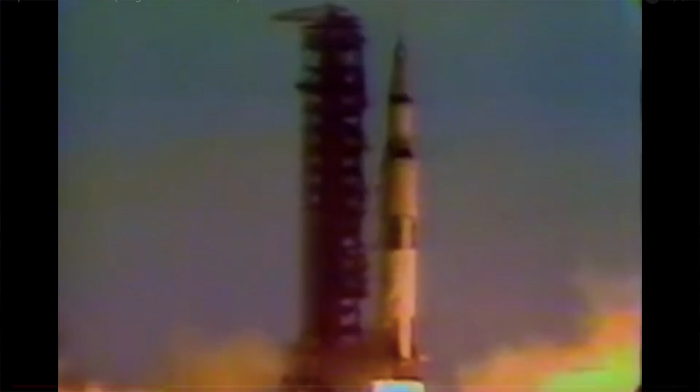Who knows? The first powered flight in an airplane happened in 1903. That flight only went 260 meters. 66 years later, we flew to the moon, which is 400,000 kilometers away. Nobody could have seen that kind of progress coming, so I'm not going to try and guess the future of alternative energy. Back to electricity.

For the typical household, air conditioning is the most energy-intensive component of your home. Heating is second if your house has electric heaters. Other homes burn natural gas to heat the rooms, and the water, which is the next leading use of energy in a typical household. So how can we get power to the house in alternative ways?

Let's begin with solar power. Solar energy can be harnessed in a few different ways. You can make electricity directly or indirectly, or solar energy can be trapped to provide heating.

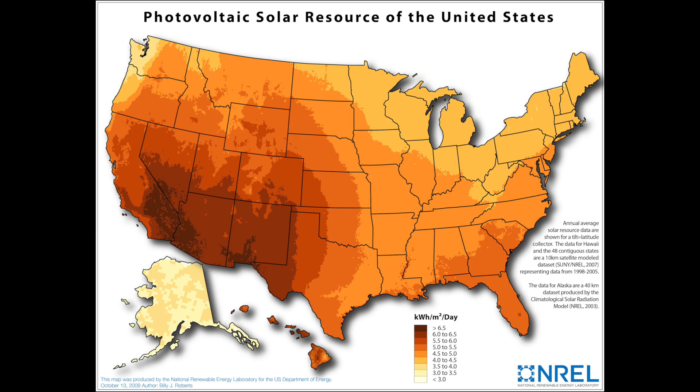The major benefits of solar power is that it's free, non-polluting, and usually requires very little maintenance. The drawbacks are that obviously you can only utilize solar power at certain latitudes, in certain climates, and only at certain hours of the day.

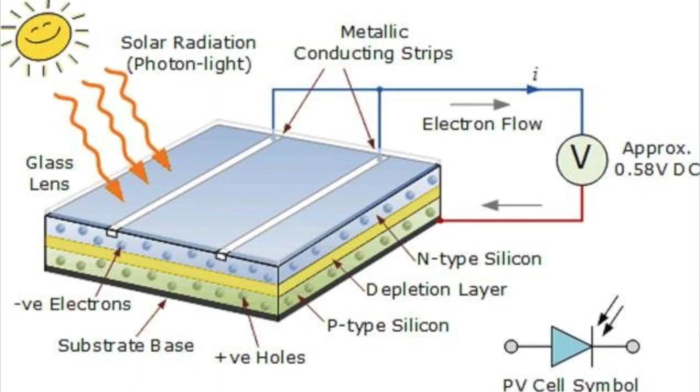Solar panels contain what's called photovoltaic cells, which absorb sunlight and, through some wizardry that I don't understand, create a constant, relatively weak current. Solar panels have gotten exponentially cheaper and more powerful over the decades, like computers have. One day, a solar panel that fits on the roof of a car might provide enough energy to power that car, but we're not even close yet.

The problem with solar panels is that they only make electricity while they are being struck with sunlight. The best hours of the day to get solar power are from around 10 in the morning to 6 in the evening. The vast majority of this time, people are spending at work or school, so they aren't utilizing this energy very well.

To be fair, a lot of things in your house would be using the electricity, and you would be getting all of that for free. The fridge needs to always run. Your air conditioning or heating is probably left on all day, even when you're gone, and a few other items.

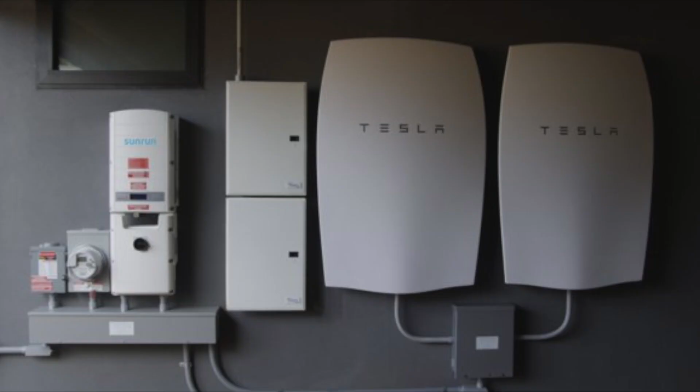Elon Musk has developed these battery packs for your house. Each battery pack is charged by solar panels, so when you come home, you can use the energy that they stored all day while you were at work. Turn on the lights, TV, music, and it's all being powered for free.

Obviously, you have to buy the equipment first, but the payback time for solar panel energy shrinks more and more every year. Solar panels have no moving parts, so you shouldn't expect to have to repair them either.

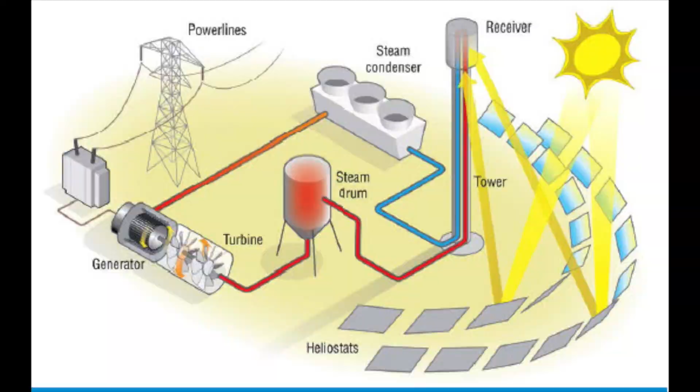Solar mirrors can also generate electricity. They reflect light to a tower, which may be filled with water. The heat these mirrors create is incredible, so the water boils, making steam, and that steam spins a generator.

Some households have big black boxes on the roof. These are solar collectors. The air inside gets hot, and that heat can be used for simple tasks like heating rooms or heating water. No need for any electricity.

Simply designing a house the right way can also take advantage of the sun. South-facing windows, if you live in the northern hemisphere, collect sunlight all day. Even when temperatures are close to freezing, the sun can feel very warm indeed through these windows, and it heats the air in your house, reducing the need to use natural gas or electric heaters.

The 5 countries that produce the greatest number of megawatts of electricity from solar panels are Germany, Italy, the United States, Japan, and China. However, solar only accounts for between 1.8 and 7.7% of their electricity demands.

Honduras generates 12.5% of its electricity from solar, higher than any country. But the total amount of electricity generated is much lower than larger, more industrious countries. China's solar capacity is 343,000 megawatts, whereas Honduras's is only 391 megawatts.

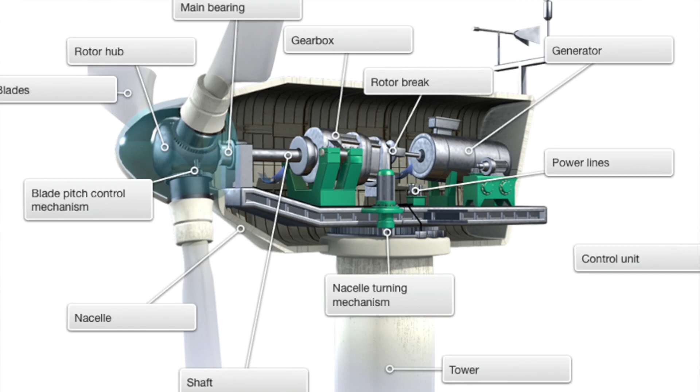Wind energy in the modern age is captured entirely by wind turbines. Wind turbine blades, which are huge, are shaped to catch the wind and create rotation. The inside of a wind turbine's head contains an electric generator, which spins with the blades to make electricity. They're really very simple devices, apart from the fact that they're huge.

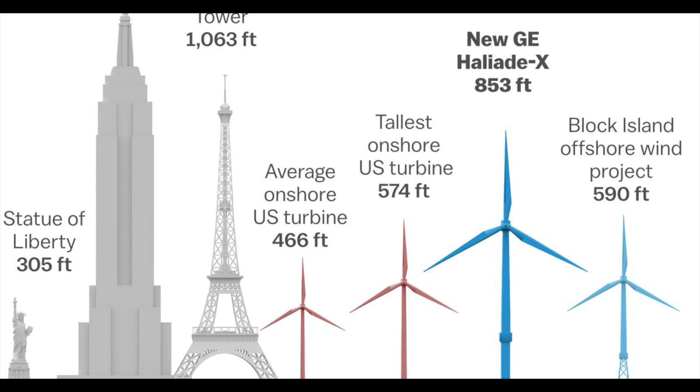Wind energy has been the fastest growing alternative energy method by far in the United States in the last 10 years. Like with oil, Texas is the leader in the United States in producing wind power.

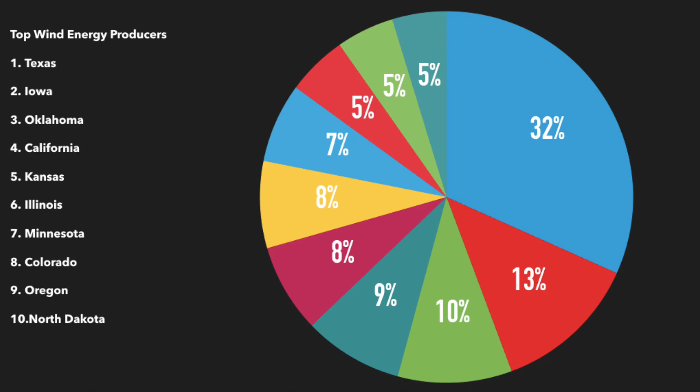The positive with wind energy is that turbines don't have any emissions themselves. Drawbacks are that the wind is intermittent, it comes and goes. Also, the resources required to build the wind energy infrastructure are gigantic.

It takes around 542 tons of iron and steel to produce a single megawatt of power from the wind. By comparison, it only takes 34 tons of iron or steel for a coal plant and just over 5 tons for a natural gas plant to do the same thing. That's why transportability is one of the great strengths of fossil fuels. It allows you to bring in energy-dense fossil fuels to make a lot of electricity in a central location, rather than spreading it all around.

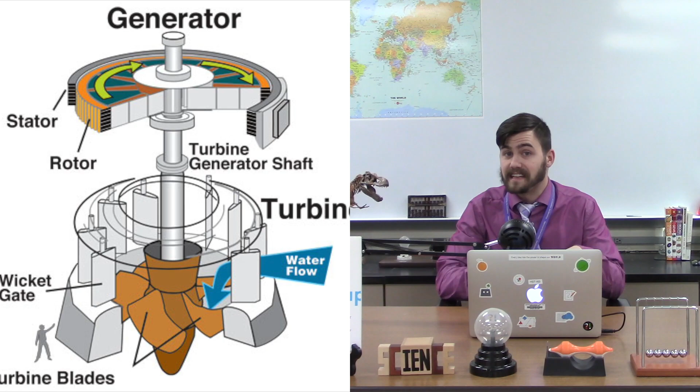Hydroelectric energy is a system of converting the potential energy of water into kinetic energy, which is used to drive turbines. This time, the velocity of the flowing water itself spins the turbines. No steam is made, unlike all other power plants. The majority of a dam is just to back the water up.

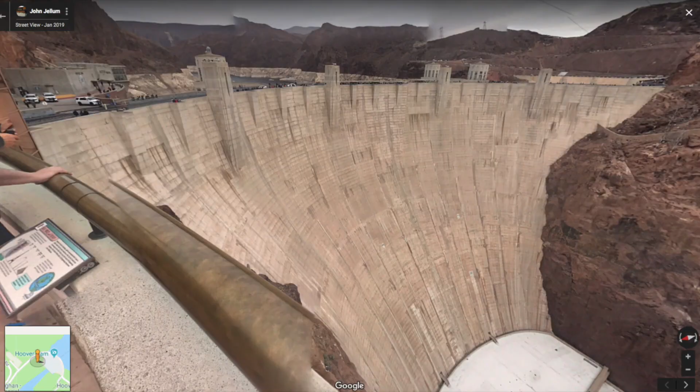River channels are widened excessively once the dam is built. Lake Mead isn't really a lake at all. Before the 1930s, it didn't even exist. Lake Mead is a reservoir created by the Hoover Dam. Once the Colorado River was dammed, the water behind it filled all the way to the top of the dam, making the river around 200 meters deeper.

Hydroelectric power is great because the water always flows, so you always make electricity, and the amount made is pretty stable — no need to worry about shortages or overproduction. Hydroelectric power has long been the dominating alternative energy producer, and it will likely continue to be for at least a few more decades. It's also cheap because you don't import your fuel — the river is your fuel.

The drawback is that we can only build so many dams. Hydroelectric output has been virtually static in the last 50 years in the United States. Worldwide, hydroelectric only accounts for around 16% of total global electricity production. It could theoretically double its current capacity, but that's about it.

There are environmental and political hazards associated with dams as well, but we'll talk about them in the next video. Next up, geothermal energy.

Electric generators are really simple, but they do still need to move. Specifically, they need to spin or rotate. That's the only way to make electricity with them. Steam has a lot of kinetic energy, and we have enough water to make it, so steam is used to

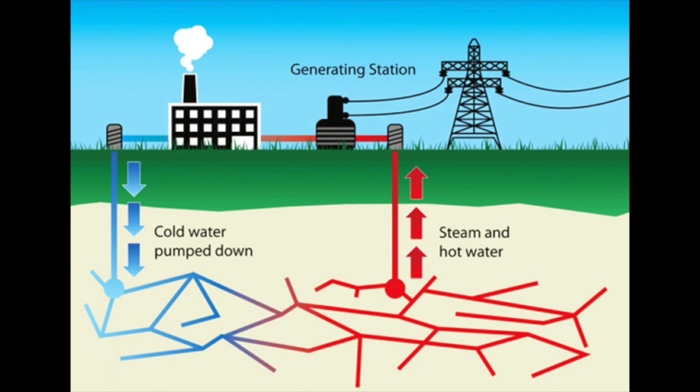Geothermal energy is also finite. Eventually you run out of steam. This can be prolonged by pumping water back into the ground, but it isn't a process that can go on forever. Still, in some countries, they get a large share of their needs from geothermal, so we cannot discount that. If it makes sense to build a geothermal plant somewhere, by all means do it.

This steam is created from proximity to magma chambers or cooling igneous rocks, relatively close to the surface. Iceland, a volcanic island nation, gets a good share of their electricity from geothermal.

Lastly, there's nuclear energy. Of all the alternative energy types we have talked about, nuclear energy is the most unfairly treated, least understood type of energy. It is also the one type of alternative energy that is most like fossil fuels, meaning it has the same benefits. Let's actually get the misconceptions out of the way first.

1. Nuclear power plants do not bombard their surroundings with radiation. Human beings work in nuclear power plants, and they don't come home sprouting 3 arms and 12 eyeballs. Is the stuff inside a nuclear power plant radioactive? Yes, everything is radioactive to some degree. A human being releases more radioactivity when they stand next to you than a power plant does if it is built literally across the street from you.

2. The type of uranium or thorium used in a power plant cannot explode. It's impossible. Nuclear explosion is not an intrinsic property of uranium. You have to enrich and alter it significantly. Why do you think it cost billions of dollars and 4 years for the Los Alamos scientists to build the first bomb? Because they were changing the fundamental nature of matter.

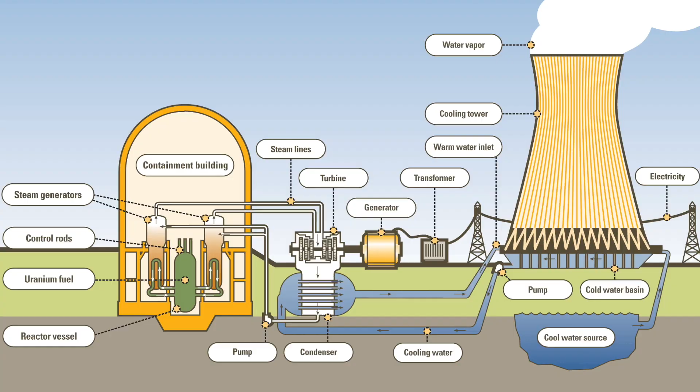Now that we have that out of the way, how does a nuclear power plant work? The infrastructure of a nuclear power plant is extremely similar to a coal-burning power plant. The radioactive isotopes, which come in long bars we call rods, get very hot and their heat boils water, makes steam, spins turbines, and powers generators.

What you see coming off of the cooling towers in nuclear plants is steam. No radioactive waste is flying into the air.

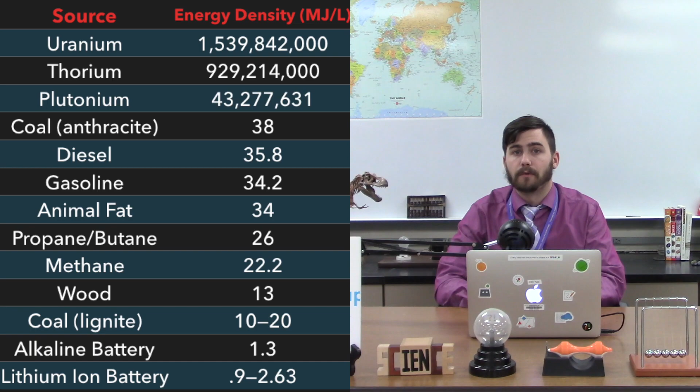Radioactive isotopes are incredibly energy dense. The energy density of anthracite coal is 38 megajoules per liter. Uranium's energy density is over 1.5 billion megajoules per liter, and a 12-foot uranium rod can last 6 years in a power plant. Because these isotopes are solid, they are transportable and easy to manipulate, just like coal.

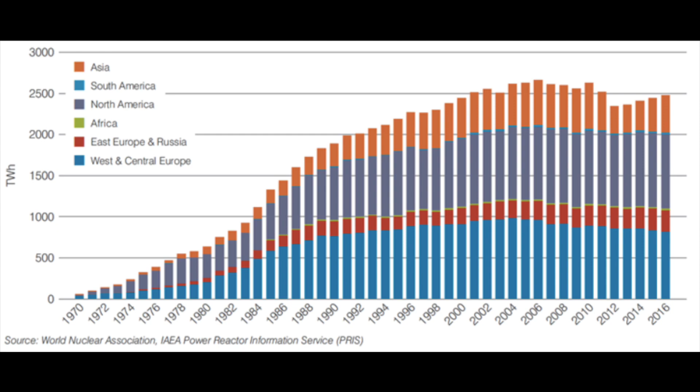Nuclear power actually produces almost 20% of the United States' electricity, but our capacity to generate electricity with nuclear power has barely increased since the 1980s, when you know what happened.

The real disadvantage to nuclear power, apart from the fact that people think it's scary, which isn't a real disadvantage, it's just one of the many things wrong with people, is that a nuclear power plant is very expensive to build and maintain. However, if we started investing more in nuclear power, the cost of production and maintenance would go down. That's how literally everything in a market economy works. Well, except for medicine. But again, that's one of the many things wrong with people.

Next time, we will talk about natural resources such as water, trees, and the air, as well as human impact. Thanks for watching.